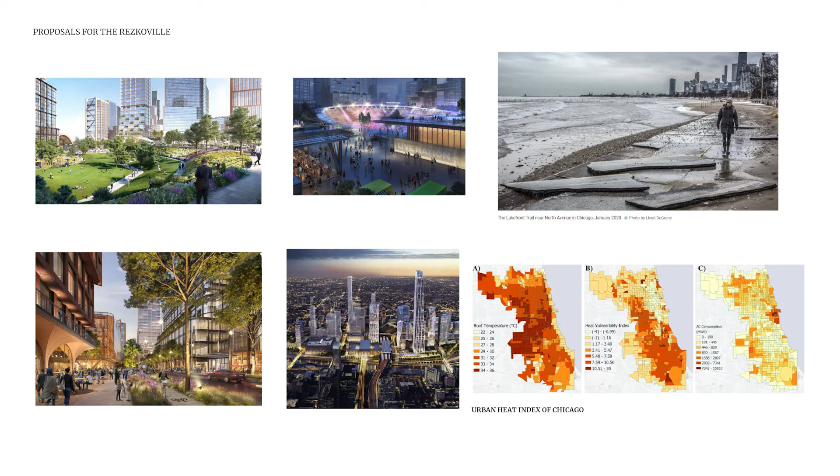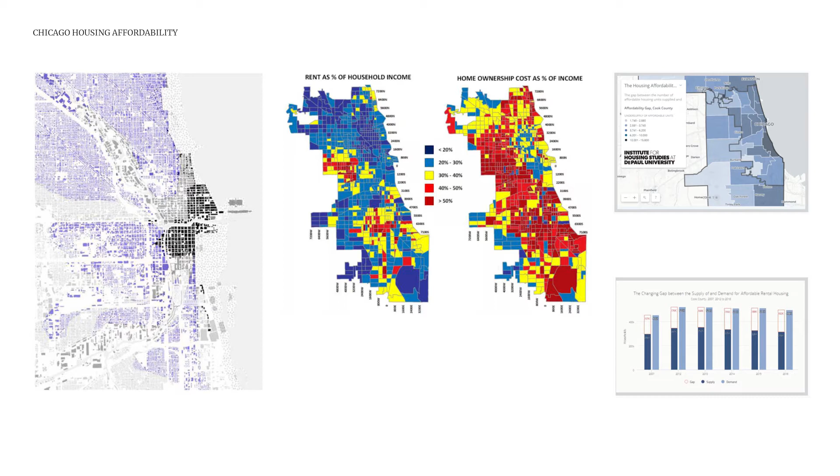The affordability gap is the gap between demand and supply of affordable houses, in which case the demand is always higher than the supply. The government says housing is affordable if a family spends no more than 30% of their income to live there. This threshold is called affordable rent burden, but 30% of 1 million is very different from 30% of 20,000. If we line up all the families in a place by income, the median family income is

And after seeing the median incomes of all the different areas, the median income for a family of 4 in Chicago metropolitan area is $73,600. That's a lot higher than the median income for Chicago alone, which is $54,100. The area used to calculate Chicago's median income is a lot bigger than the city itself.

Now, what interested me was: why not create a circular program where the solution is sustainable, affordable, and livable, and how can all these three come together? Involvement of the public has actually proven to be a solution towards affordable housing.

For instance, here is an example of Half a House by Alejandro Aravena in Chile, where the level of completion was only 50% and the rest was the house owner's involvement. On the other hand, the Urban Rigor in Rotterdam had a level of completion of 100% but no residents' participation.

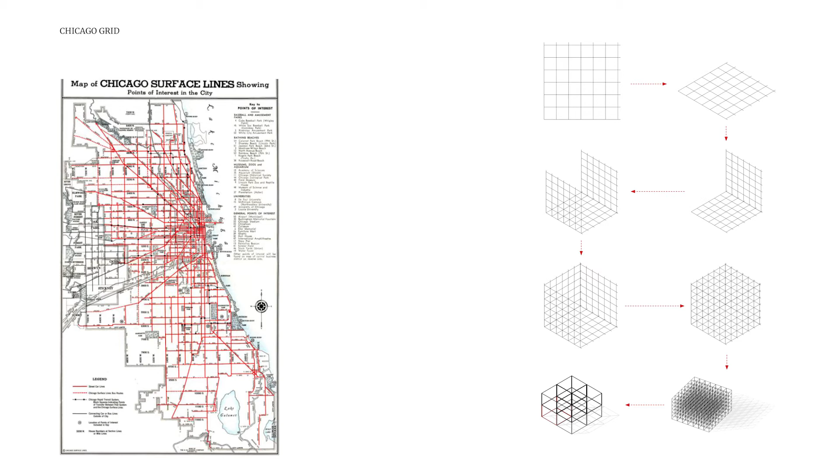After studying the interesting grid of Chicago, as can be seen in the image on the right, I was able to turn the two-dimensional grid into 3 dimensions, which led me to cellular automata.

Cellular automata, or CA, is a computational method able to simulate the process of growth or generation of simple individuals by following simple rules. A CA system consists of a grid network of cells where each cell has a state of being occupied or empty. It starts with an initial status of cells and is based on a set of rules which works according to the number of occupied neighbors. This 2D cellular system is then visualized in 3D as a start.

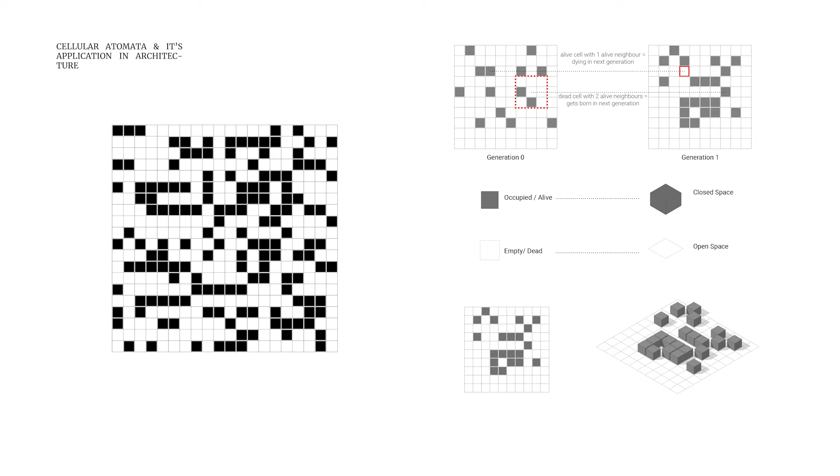In order to form a master plan for Rezkoville, it is crucial to understand the existing structure of the city.

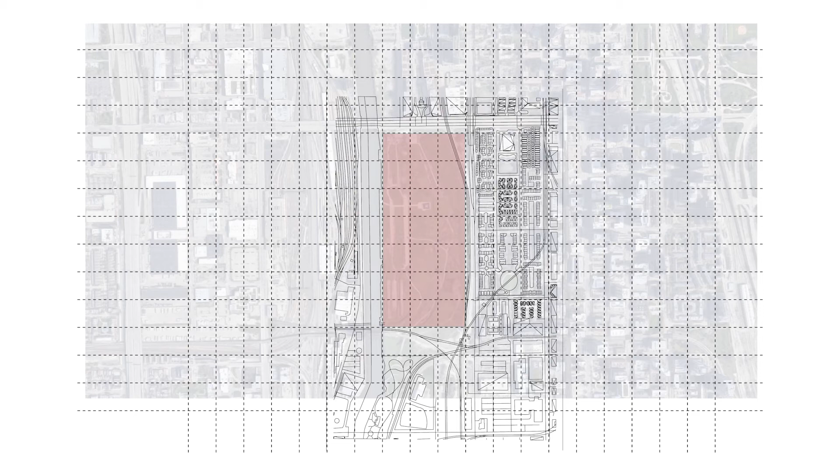The initial step was to use the original 1-mile grid of Chicago, and an intermediate grid of 100 meters was formed as the basic block for planning. Taking the 100 meter by 100 meter grid of Chicago onto the site helped form these 100 meter square blocks, and 21 blocks were generated onto the site.

Considering those 21 blocks on the site, I decided to use the first strip of 7 blocks for the intervention. As the site is quite large, it would be a challenge to find investors to construct on the whole site, so I proposed to do the development in stages.

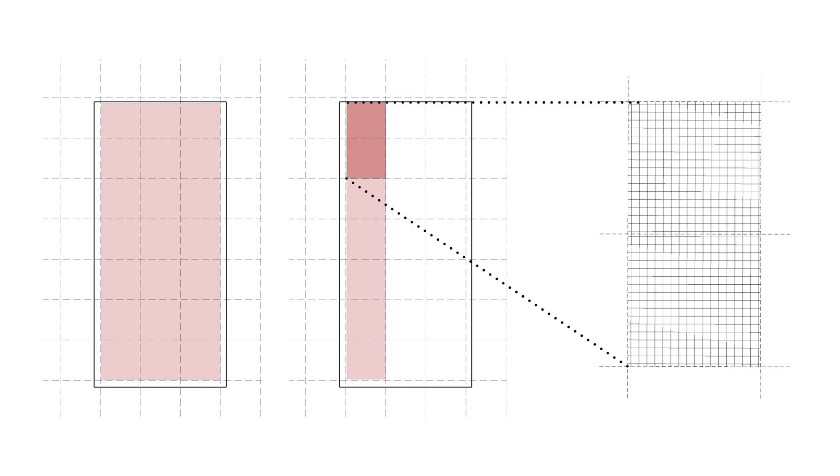In that first strip of 7 blocks, I used cellular automata on the first 2 blocks of 100 meters square each. The whole concept of this computer-generated modular structure is that we can manipulate it according to need. For the modules to generate, I used a basic 6 by 6 meter base unit, which is a space for a single user.

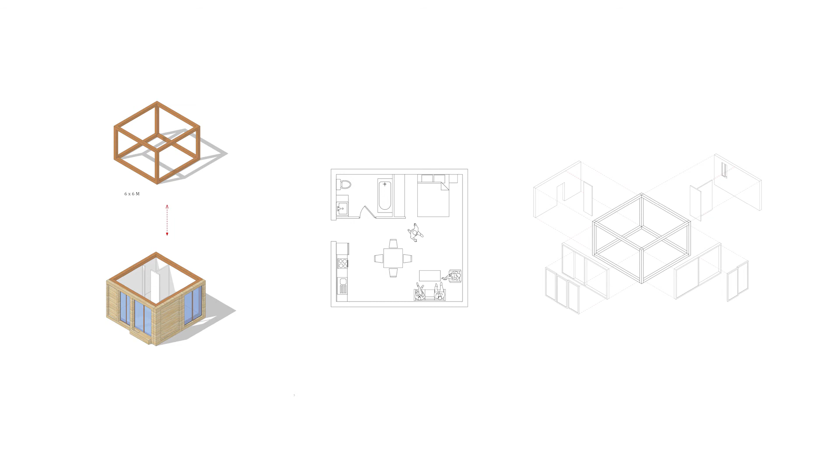The modules at this stage are at time 0, but in the future can either grow or shrink, all according to the user.

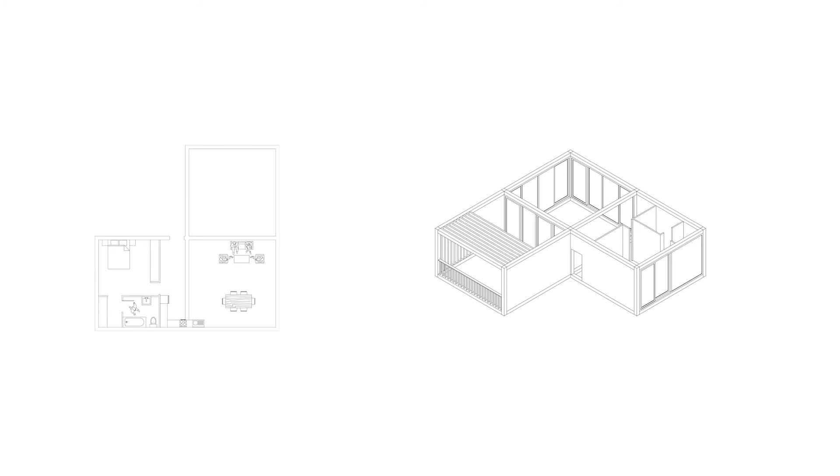Every unit here is made of a 6 by 6 meter module and is designed so it can either grow or shrink accordingly. The Type 1 house is made of one module, a 36 meter square space for a single user. Type 2 is made of 2 modules, a 72 meter square space. The third type is a double-story unit made of 3 modules, giving a 108 meter square space.

These are only a few of the possibilities I considered, but every module can be made different and unique. The 6 meter by 6 meter modular grid was imposed on the 100 meter by 100 meter block. The modular system now grows, leaving 25 to 30 meters of offset for public space and landscaping.

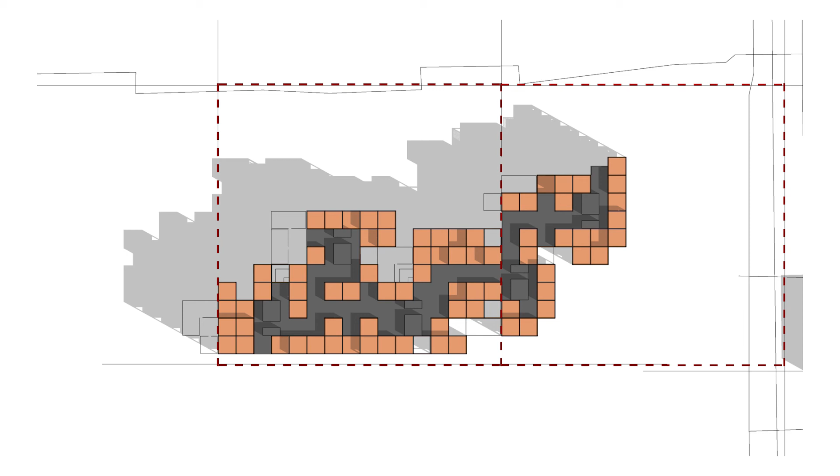Cellular automata has generated a system according to the rules, which is then manually manipulated for the structure.

In this structure, each floor has a different type of modular house as shown before, decided by the users, as users only buy space according to their needs. In other words, users get to decide how much space they need for their house, ranging from a single-person house to a multi-family unit, and they only pay for the place they use.

In this process, the CA system helps to show the possible solutions of growth or even shrinkage.

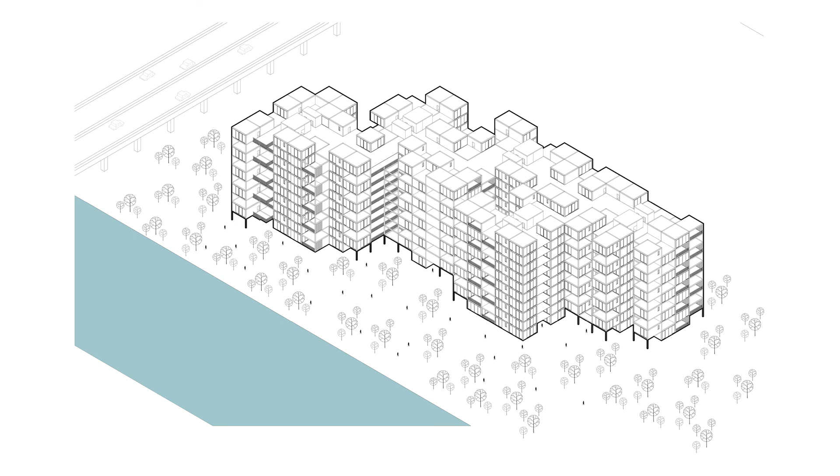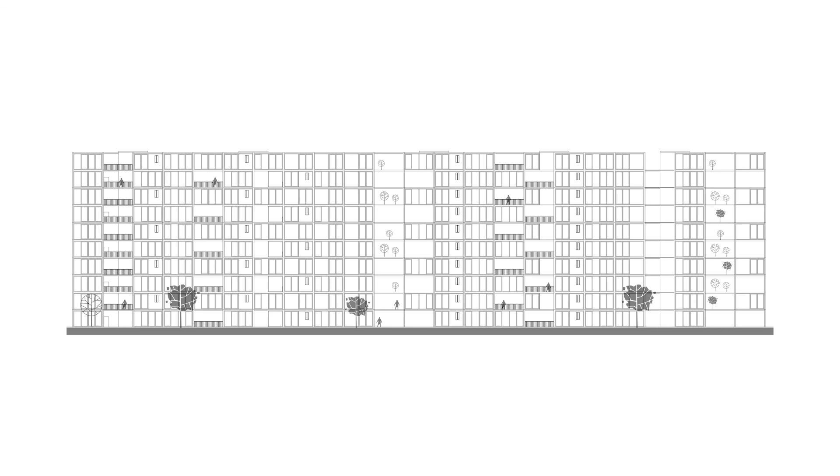A possible elevation shows the structure is breathable too, as the system generates enough space so that existing modules could either shrink or grow depending on the user's needs.

This kind of cellular automata system and manual manipulation shows that the system not only has the potential to grow horizontally, but it can grow vertically as well.